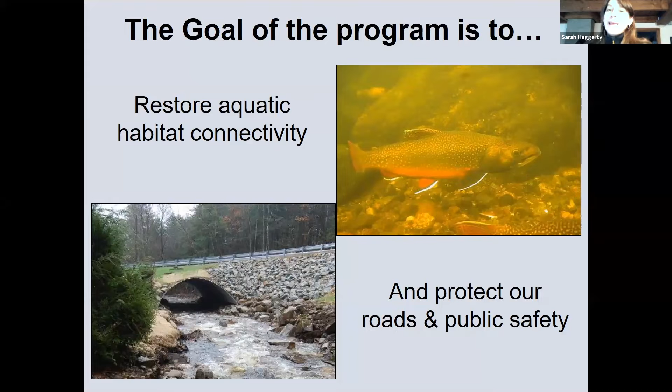The goal of this program is to improve fish and wildlife habitat by restoring aquatic habitat connectivity and to improve community safety by protecting our roads and infrastructure investments.

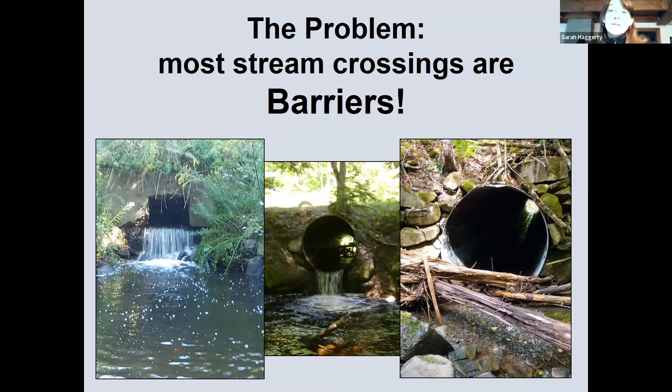The problem the program is addressing is that most culverts or road stream crossings on the landscape today are undersized, creating problems for fish and wildlife trying to move up and downstream. They can also make roads more vulnerable to large storm events.

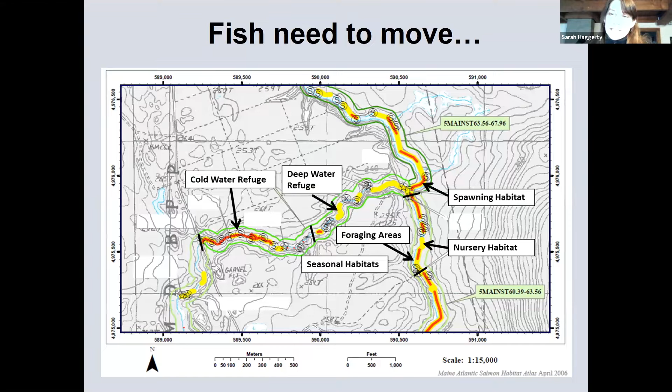The ability of fish to move up and downstream is very important because fish need to move to access all the different types of habitats they'll need over their lifetimes, on a daily basis, in different seasons, and throughout their different life stages.

The other problem this program addresses is the need to protect public safety and our infrastructure investments. Undersized culverts are more vulnerable to the larger and more frequent storms we've been seeing over the last several years. Washed out roads aren't good for anyone - not for public safety, local budgets, or fish and wildlife when the road has washed into the stream.

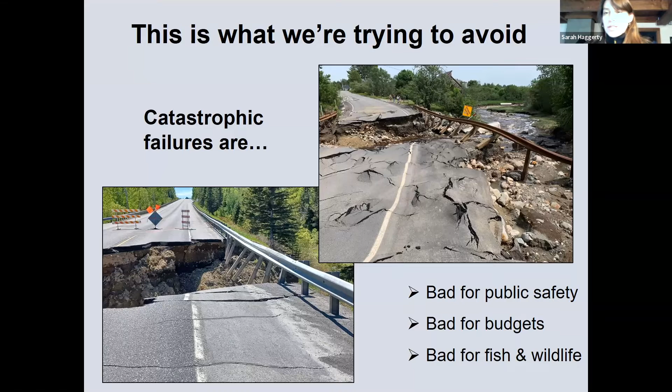To address these problems, partner organizations working together developed this state program to help fund culvert replacements on municipal roads. These funds help offset the costs of replacing undersized and failing culverts with more appropriate crossing structures.

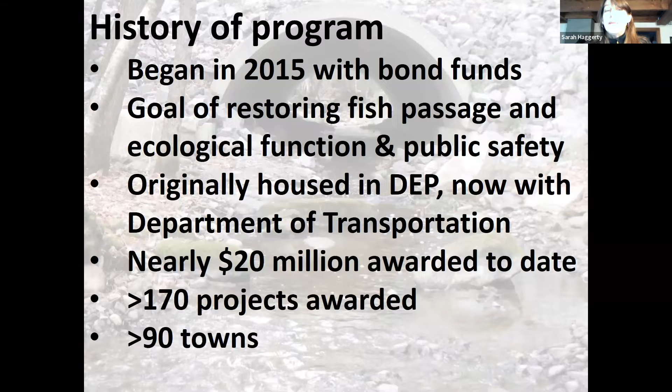This program was initiated in 2015, initially using bond funds to support it, and the goal from day one was to restore fish passage and protect public safety. It was originally housed with the Maine Department of Environmental Protection but has now transferred to the Maine Department of Transportation. To date, the program has awarded nearly $20 million for more than 170 projects in more than 90 communities - it's been a very successful program over those years.

The goals of the grant program have remained the same as the program has moved from the Department of Environmental Protection to the Department of Transportation.

Applications to this program will be evaluated based on criteria in three categories. The main focus is still restoration of fish and wildlife habitats, which accounts for 50% of the points an application can receive. Second, the project should reduce flooding and improve public safety, accounting for 25% of the score. Finally, the project must represent an efficient and cost-effective investment for the final 25%.

Here are some details of the program. As mentioned, it's now administered by the Maine Department of Transportation. The program is only for municipal roads, so no state or private road crossings are eligible. Each project could receive up to $200,000 as reimbursement funds, with a requirement of a minimum $5,000 local match, which can include cash or in-kind contributions. The program is competitive, and projects will be evaluated based on the improvements they bring to natural resources and public safety.

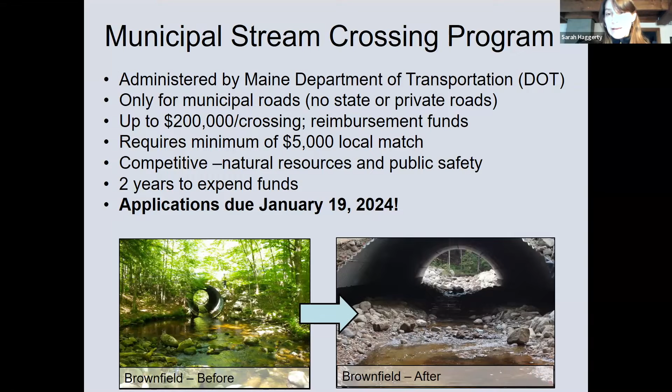The scoring criteria: projects will be evaluated based on the extent to which they restore habitat for fish and wildlife, and the extent to which a project meets 1.2 times the stream's bankfull width. That's a sizing criteria. The proposed stream crossing size must meet Maine DOT's 100-year flood standard.

Applications should include all eligible stream information, like a stream profile, bankfull width information, and any other relevant information on the stream itself. Include relevant information on the proposed structure, including size, type, bottom materials, etc., and any available information on fish and wildlife and the improvements that will be brought through the project. You must include photos of the existing structure and any information on flooding history or other safety concerns. Costs and an actual budget should be included, including that minimum $5,000 local match.

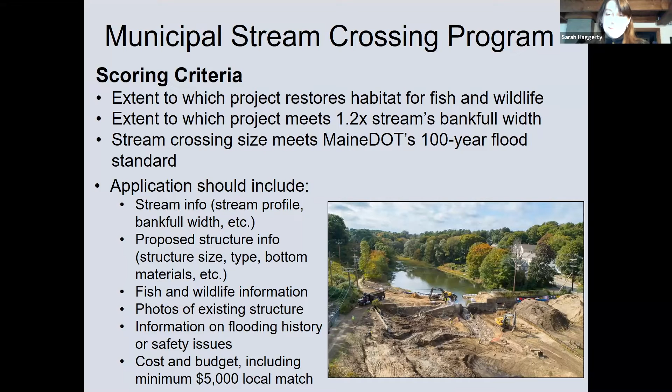Some additional requirements include that plans must have an engineer's stamp. Any projects proposed over a 10-foot span must be reviewed by Maine DOT's Bridge Maintenance Office early in the process. A project must also be able to obtain or have already obtained all necessary permits, which could be from the Army Corps of Engineers, Department of Environmental Protection, etc.

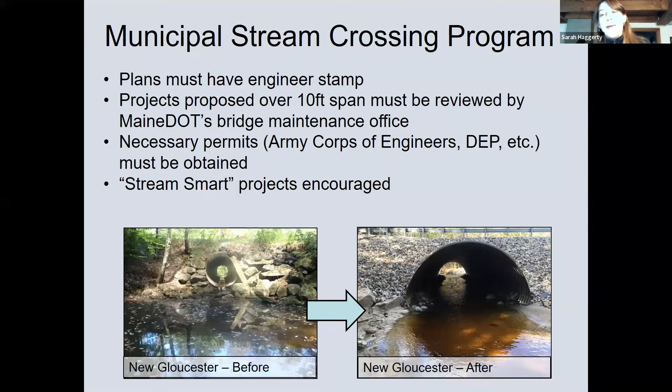And finally, stream smart projects are encouraged. They are the most likely types of projects to meet these criteria and even surpass the criteria described here.

Finally, there are some key aspects of projects that would make them a good fit for this program. For example, projects in areas where fish and wildlife resources are being hindered and can be improved by the proposed project. These can include fish species, including freshwater and diadromous fish species, endangered and threatened species, and other wildlife species.

Bridges are probably not the most appropriate structure for this program because they're not usually a barrier problem for fish and wildlife movements. Projects where the culvert is a safety or maintenance issue are great projects for this program.

You should include documentation on this. This can include projects where detour lengths are long or where high-risk locations would be cut off if the road washed out—for example, if access to schools, hospitals, or emergency vehicle access would be a problem.

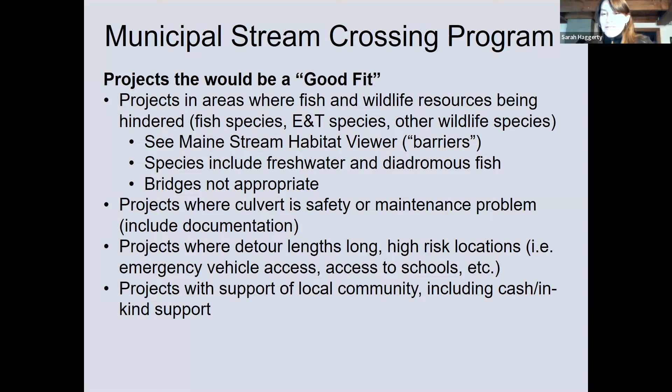The projects should also be supported by the local community, and that can be shown through the availability of the $5,000 match funds. With that, I will pass the baton over to Christian Fox from the Nature Conservancy to walk us through the application template.

Thank you so much, Sarah. My name is Christian Fox. I'm a watershed restoration specialist with the Nature Conservancy in Maine.

DOT has put together a really nice application template. There are just 15 short questions that you will need to answer to submit your application for the Municipal Stream Crossing Program grant. All of these are very straightforward, and DOT directs applicants to some very convenient online tools to answer questions that may not seem obvious at first.

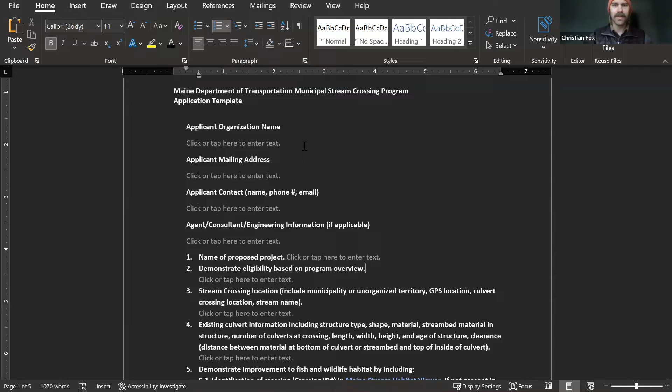Just rolling right down through this: first, you want to include the name of the organization that's applying—this is probably your town or your county—your mailing address, the contact name of the person submitting the application, and if you have retained an engineer or a consultant to help, their contact information as well.

If you have a name for the proposed project, like XYZ Bridge, you can enter that. Demonstrated eligibility based on the program overview would include detailing why this crossing is a good fit for the program, and a lot of that can come from the subsequent questions below.

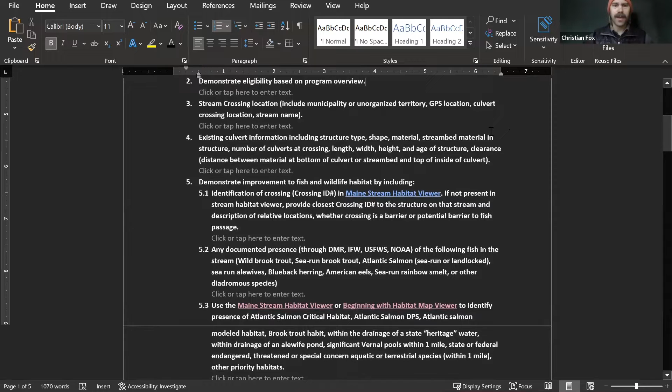For stream crossing location, you could provide the street as well as a GPS location. There's also individual culvert identification numbers, which we'll get to in a minute as well.

For information on the existing structure type, you want to provide what material it's made out of, what you're seeing inside the structure in terms of sediment or not, and what conditions—is it rusting, is it collapsing? What do you know about the age of this, and how many times has it failed or overtopped in the past?

When we get to question 5, we start looking at those ecological aspects that Sarah mentioned. For getting the identification number for the crossing, we'll delve into the Maine Stream Habitat Viewer in a second.

Each crossing will have a unique identifier that you'll be able to access through that.

You also want to reach out to the natural resources management agencies, meaning the Department of Marine Resources, Inland Fisheries and Wildlife, U.S. Fish and Wildlife Service, or NOAA, to see what fish species are present. Usually the state agencies, both DMR and IFW, are very good contacts for this and will be able to provide you with the latest electrofishing information for that site.

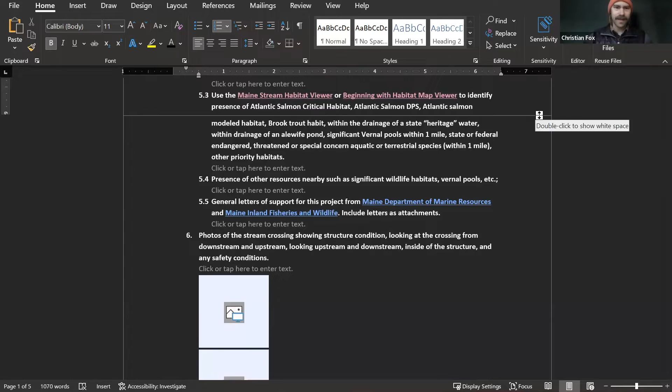Again, using the Maine Stream Habitat Viewer or the beginning with habitat map viewer, you'll be able to identify Atlantic salmon critical habitat, Atlantic salmon distinct population segment, and either modeled or surveyed spawning habitat, brook trout habitat, and many other key environmental features that will help DOT make a determination on the site. These viewers will also have information about other wildlife habitats, such as vernal pools, inland wading bird or waterfowl habitat.

When you're reaching out to the state agencies, the DMR or the IFW, to see what fish species are present, you can also tell them about the project and ask them for a letter of support, which you can include in your application. A letter of support from IFW and DMR is no longer required with the application, but applicants are strongly encouraged to connect with these agencies, both to better understand their stream and to have the support of these agencies as they submit their applications to DOT.

Photos are one of the best ways to get to learn these sites, so please provide as many detailed photos as you can. At a minimum, we usually like to see photos looking at the inlet and outlet of the crossing, looking upstream and downstream, and looking at the road crown to get a real idea of the site. These photos may be directly uploaded into the application template.

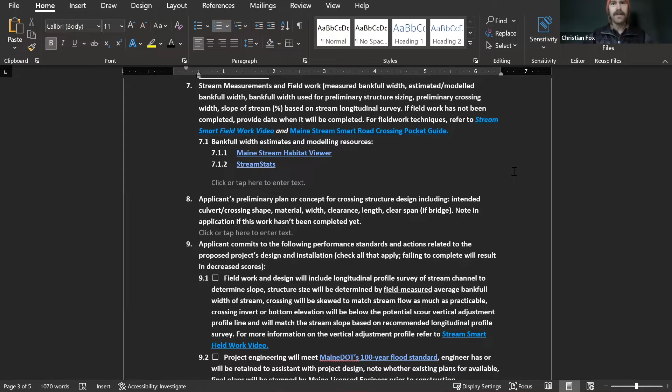Stream measurements are another key factor in understanding a site. Sarah mentioned 1.2 times the bank full width. We'll go through how to get that in just a minute using a couple of online resources. These will be key for you and your engineer in designing the final structure.

If you have a preliminary plan or a concept for the crossing that you want to install, please include that in section 8. This can be as simple as an embedded concrete box or a span bridge.

Number 9 is about the commitment that your town is making to adhere to the Stream Smart principles that will make this structure climate resilient and passable by wildlife in the future.

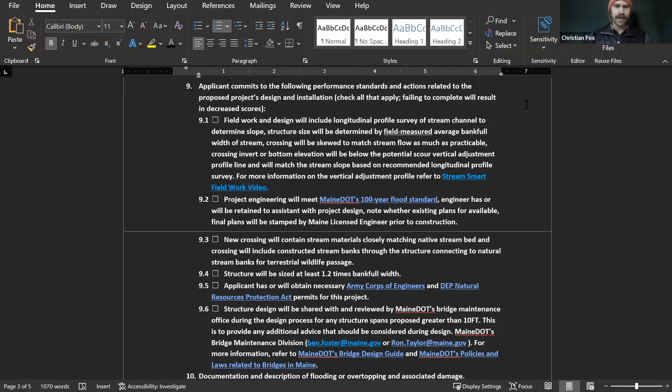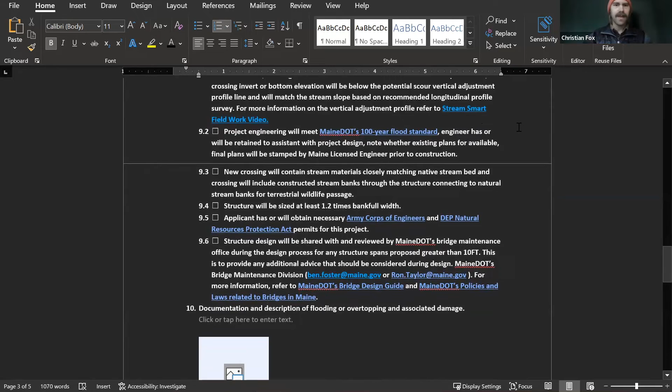This begins with conducting good fieldwork, which will probably happen in the spring after the awards have been awarded. It will also include project engineering to meet Maine DOT's 100-year flood standard, which is linked here, and a commitment to contain native stream bed materials throughout the crossing and construct a structure that is 1.2 times the measured bank full width.

Again, as Sarah mentioned, you will need to obtain all the appropriate permits, including an Army Corps and DEP Natural Resources Protection Act permit. Lastly, the structure design will have to be reviewed by Maine DOT's bridge maintenance office prior to construction to identify any potential issues.

Section 10 gets into the risk of flooding at this site. If you have documentation or photographs of flooding, overtopping, or any similar damage or blockage at the site, please include it here. There's a section for text and a section for any photos that you have.

Section 11 is an opportunity to assess the safety and community impacts that would be suffered if the structure were to fail in its current condition. DOT has a very nice viewer that we will access in a second to determine this information.

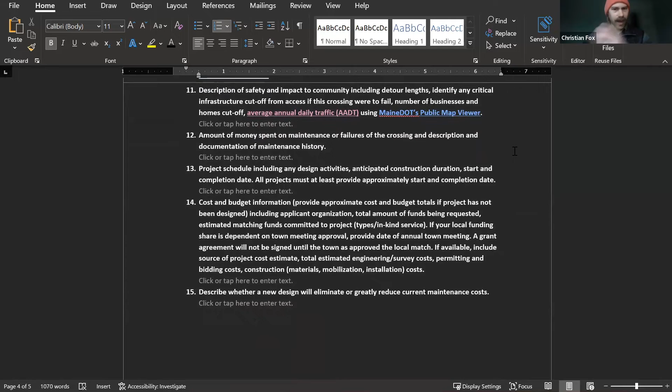For section 12, please include the amount that you have spent on maintenance or failures in the past of this crossing. For section 13, please include a rough project schedule, including start and end dates. If you are able to compute a budget for this project, please include that in section 14. For question 15, please describe how the new structure will help alleviate ongoing maintenance costs at the existing crossing.

All right, as you can see, just 15 short questions, and there are a few resources available to address these. Scrolling back up the application, the first resource that we come to is the Maine Stream Habitat Viewer. All of these are accessed online by the links directly in the application template.

However, if we flip over to a quick overview of the habitat viewer, you're able to see how you can use this tool to answer the questions.

Once you're in the viewer, simply navigate to the crossing you're interested in by zooming in and panning around. Once on location, you will see a dot, and if you click the label box, you will see a number that designates that crossing. This is the number you'll want to use when the application references the site ID.

By clicking on the individual crossing, you'll see a lot more information about that site, including the crossing type, whether or not it's a barrier, when it was surveyed, and a whole host of other information. This includes the estimated bank full width, upstream miles blocked, and any upstream or downstream barriers from that site. You'll want to include all this information in your application, as it gives DOT a much better idea of what sort of ecological benefits replacing this culvert would give.

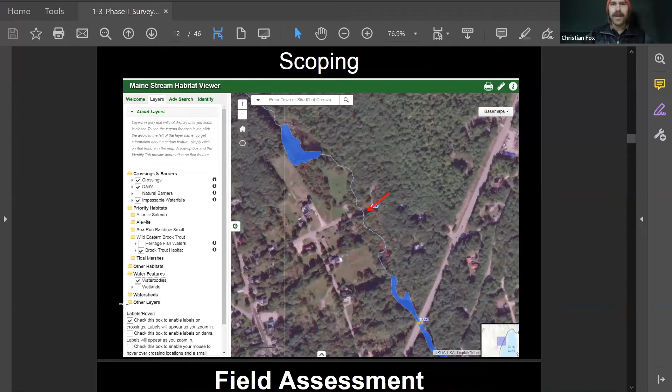You'll also notice that the viewer has a lot of contextual information about the area your site exists in. By clicking on information about Atlantic salmon, brook trout, and other features and layers, you'll be able to answer additional questions in the application, such as: is this in Atlantic salmon habitat? Is this in brook trout habitat? And are there other important ecological factors such as vernal pools or inland waterfowl or wading bird habitat nearby?

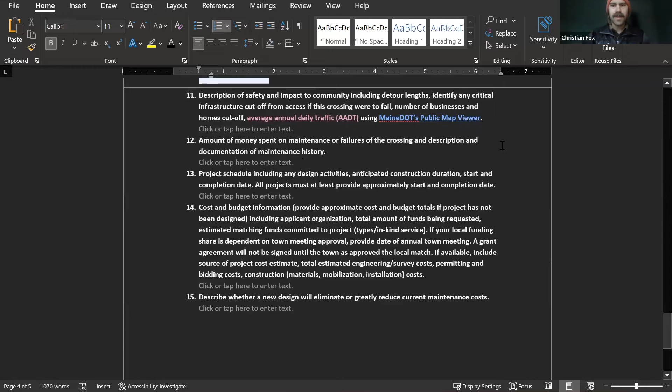Question 11 asks for average annual daily traffic counts. These are easily accessible using DOT's public map viewer. Following the link allows us to access the online map viewer.

By zooming in on a given area, we can identify culverts of interest, as well as the average annual daily traffic count. To do so, simply select Bridges and Culverts, as this should display the majority of the crossings within Maine. By clicking on any given crossing, you'll be able to access the information that DOT needs.

In this case, you want to look at the AADT, average annual daily traffic counts, and the bypass length to answer this question. Lastly, Maine Audubon hosts many great resources for measuring bank full width yourself or further understanding StreamSmart online. This may be accessed at streamsmartmaine.org.

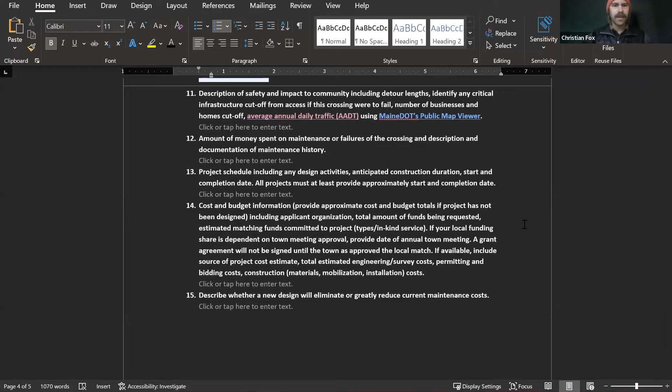By going through each question and using the tools referenced within, you'll be able to complete this application in very short order and with very little headache. Thank you so much for joining me today.